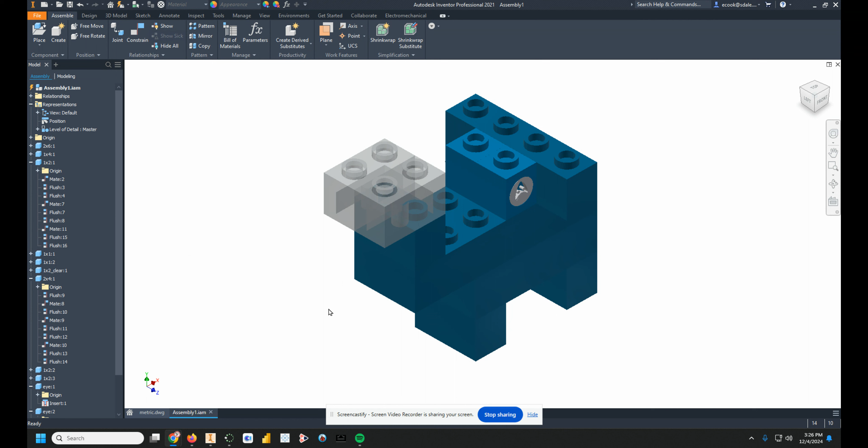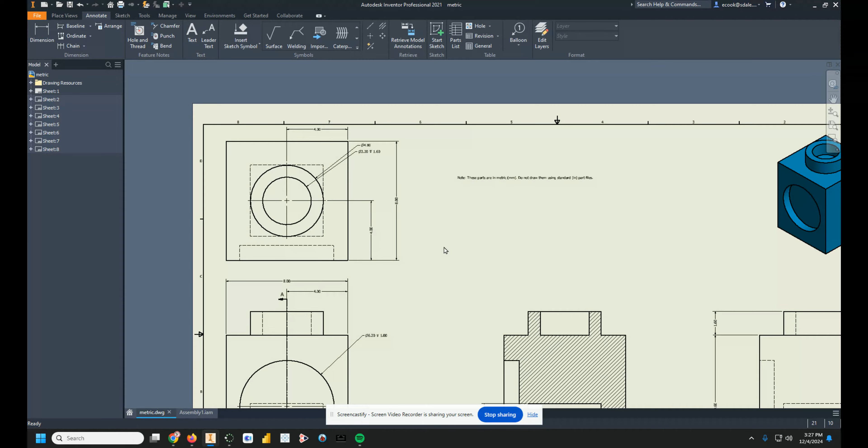The first thing that I want to draw to your attention is the fact that these parts are in metric and not standard inches. Lego is actually from, I believe, a Danish company in Europe, and pretty much everywhere else in the world they use the metric system. So all of these parts are going to be in metric. Specifically, these are in millimeters. So 8 millimeters, 4 millimeters, etc.

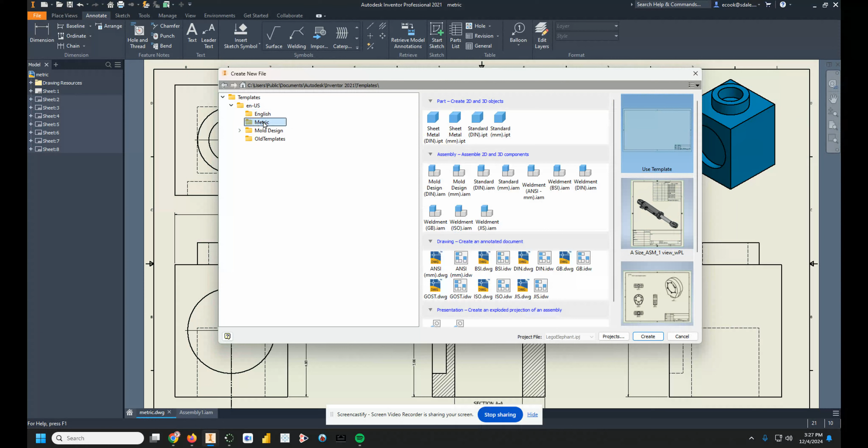So really important to make sure you start out by making a metric part. So typically, you start out in US standard IPT. Not for this one. You need to go to metric and then select standard millimeter IPT. Then everything's good after that. So you will be drawing this using the metric system.

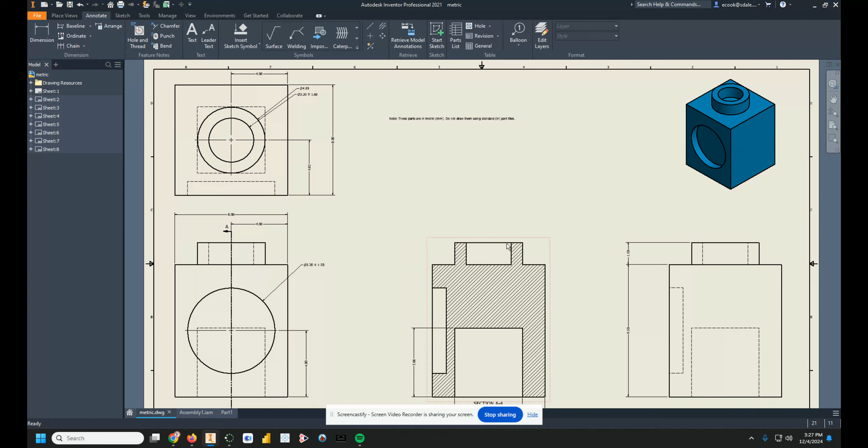All right. The next thing I want to draw to your attention is once you make this part, you need that one, obviously, but specifically this one. Once you make this part, you will be using the rectangular pattern tool to make this one. And I even put a little note here. You do not need to redraw this Lego part. Instead, rectangular pattern the 1x2 block to create the 1x4 block.

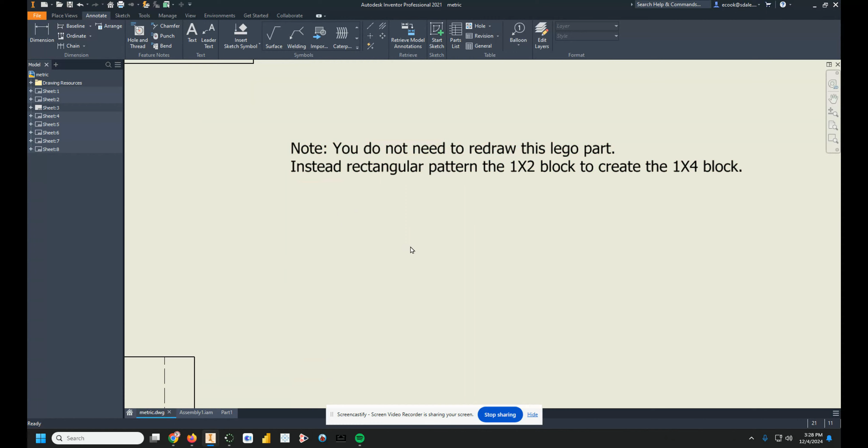Same thing is true for this 2x3 block. You do not need to redraw these. You just need to use the rectangular pattern tool to make either the 2x4, the 1x4, etc. Okay, and so what I mean by that is, let's take a look at this 1x2. So pretending you've drawn this like you have a million times now, and you're at this point and you want to make, let's say, the 1x4. So 4 holes in line.

Make sure that you are in the 3D Model tab, and we're going to use this rectangular pattern tool. And I want to make sure I select the pattern solid because it selects all of it, not just a specific feature. Okay, we want the whole thing. Then we want to choose the direction. So if I want it to go this way, then I'll choose this direction. And it gives you this little green wireframe to help you figure that out.

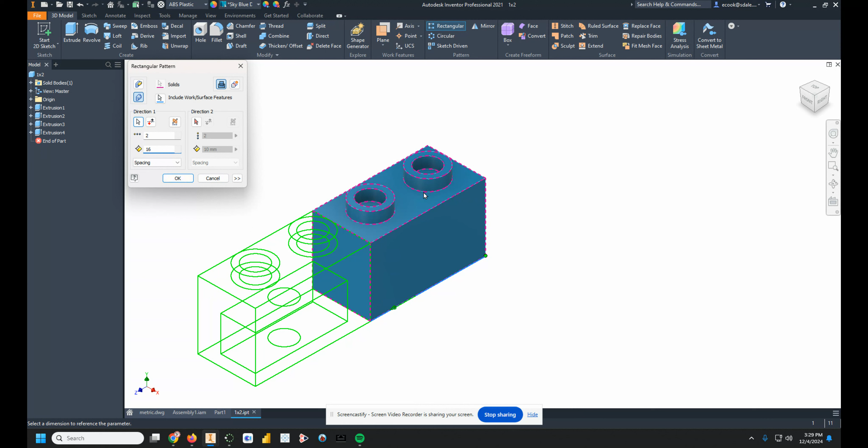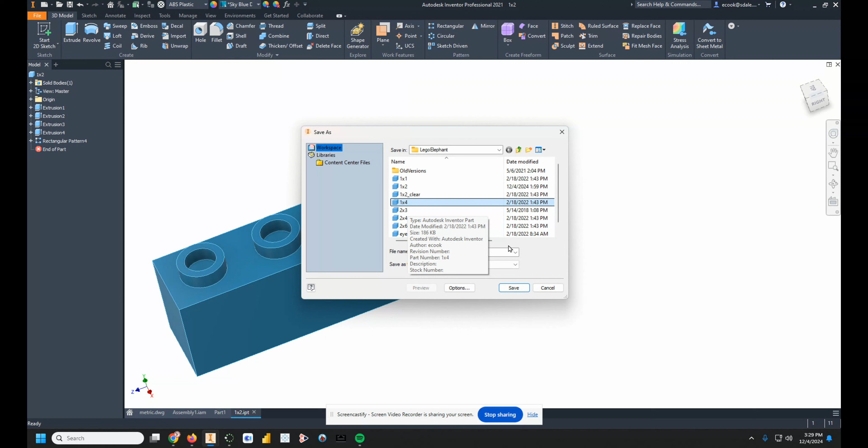And the distance for the spacing is going to be 16 millimeters because that's what the distance would be, because 8 and 8, 16. All right, there you go. Boom, 1x4, no big deal. You do want to make sure that you will save this as your 1x4. So saving is going to be really important. So if it's a 1x2, make sure you save it as the 1x2. And then after you make the 1x2, go to Save As and name it the 1x4 or the 2x4, whatever. Okay, so make sure you keep track of how you are saving this.

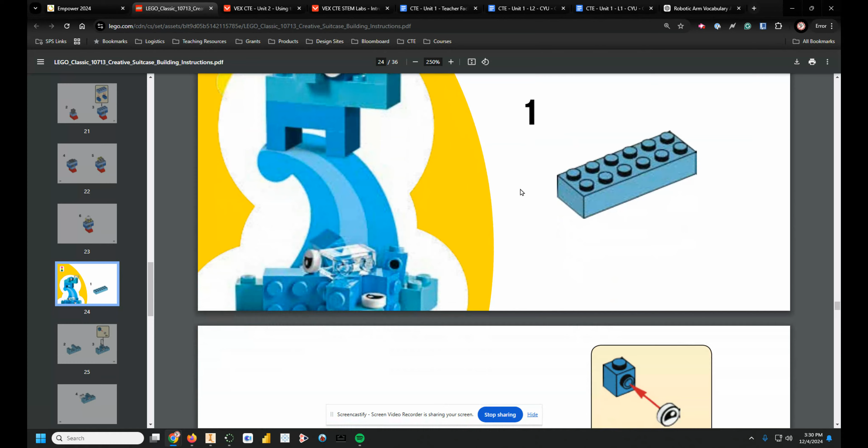The last thing that I want to draw to your attention is the instruction manual. So if I go back to Lego Elephant, I've added that in the instructions. There's a link that takes you to this Lego page, and I believe it's on page number 24. It is. And this will give you instructions on how to put this together. So it's like you're building with Legos, but virtually, okay? So you can see how this whole elephant goes together.

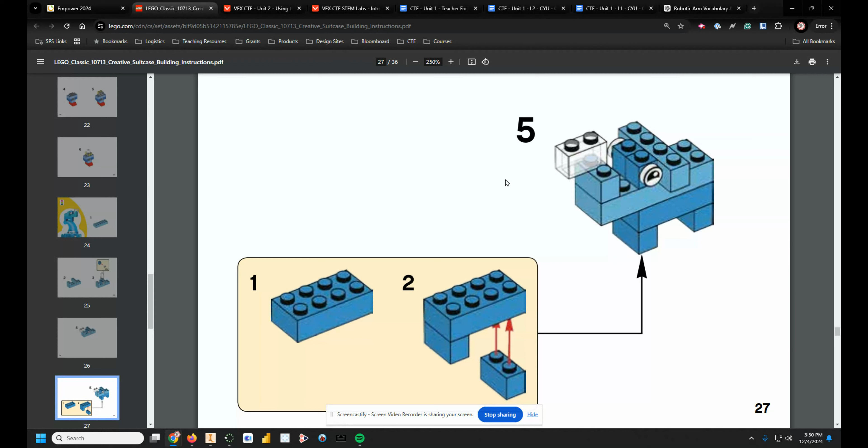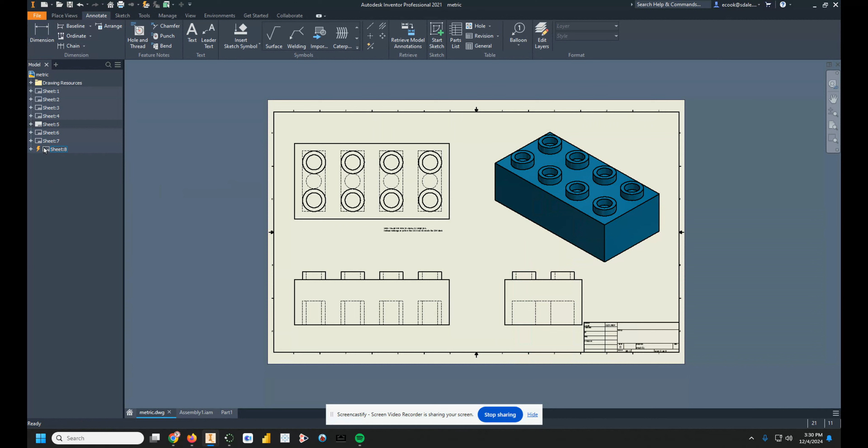You will make these 1x2, a clear 1x2 and a blue 1x2. So there's going to be 2 separate files. And yeah, that's pretty much it for this guy. Make your 1x2. Use your rectangular pattern tool. When you make your sheets, this will be in metric, but all I'm concerned about for this one is, oh, see, it's saving it as that, so I have to go back and edit it.

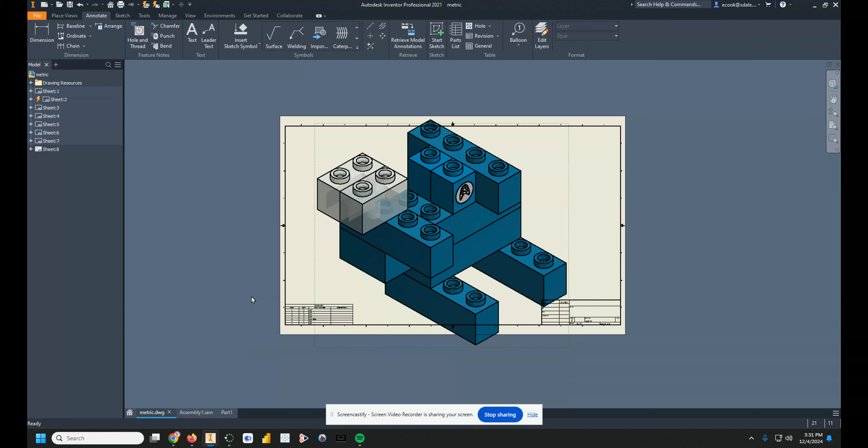But anyway, once you make this and you get your assembly together, then you can go ahead and just place it on a sheet. I'm gonna open this part up, it's driving me crazy. It's a 1x2. And turn that in. So export it as a PDF, all is good.